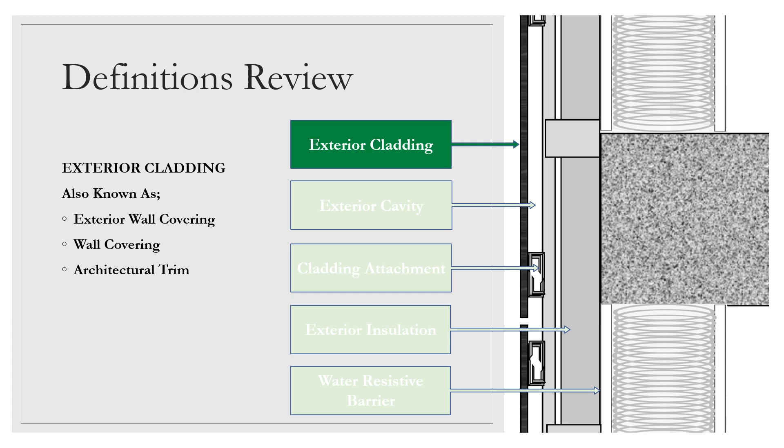So we start with exterior cladding. Exterior cladding might also be called exterior wall covering, or architectural trim. The exterior cavity, that's that cavity between the exterior cladding and the next layer. That's either the water resistant barrier or the exterior insulation. That is known as exterior cavity, airspace, concealed space, or just simply the space. You'll see that often in the code too.

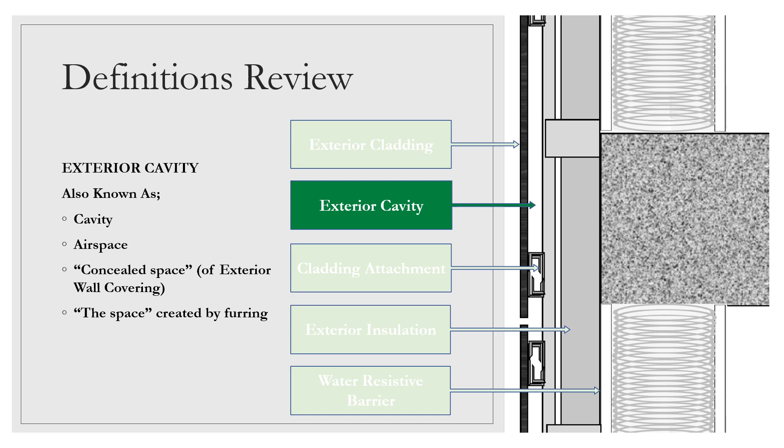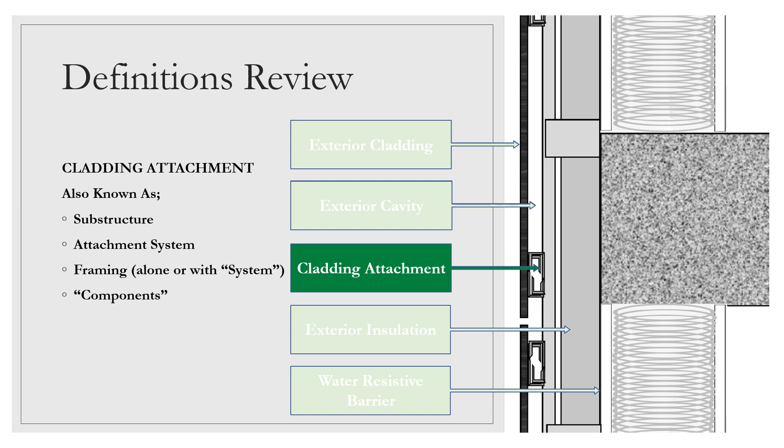Cladding attachment system, sometimes called substructure, attachment system, framing or framing system, or just components. For exterior insulation, you might hear me talk about rigid insulation or the CI layer.

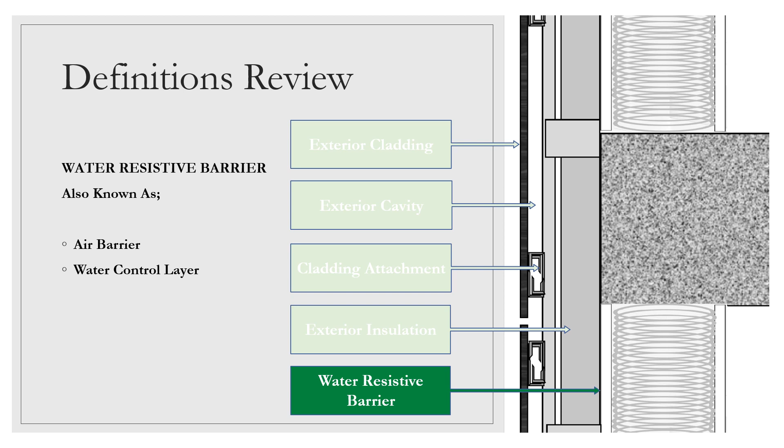The water-resistant barrier is mostly referred to as water-resistant barrier, but you might also see air barrier or water control layer - that's a very common one too. Together, these are also known as the exterior assembly, facade system, or exterior wall covering. You'll see exterior wall covering used both to mean just the cladding or the entire assembly with all its components.

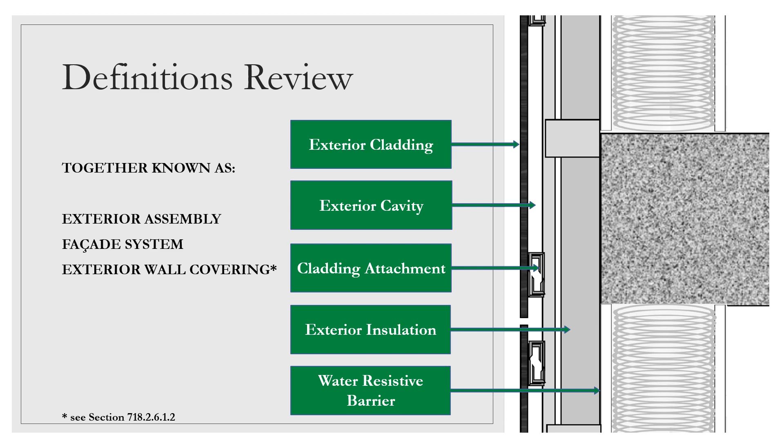Let's get into a quick review of NFPA 285. Probably if you're listening to this, you already have some familiarity with it. NFPA 285 is a multi-story fire test that determines whether the cladding or exterior assembly, including the cladding all the way back to the sheathing, contributes to the propagation of flame and heat, either up the wall to the next level or laterally to the next room.

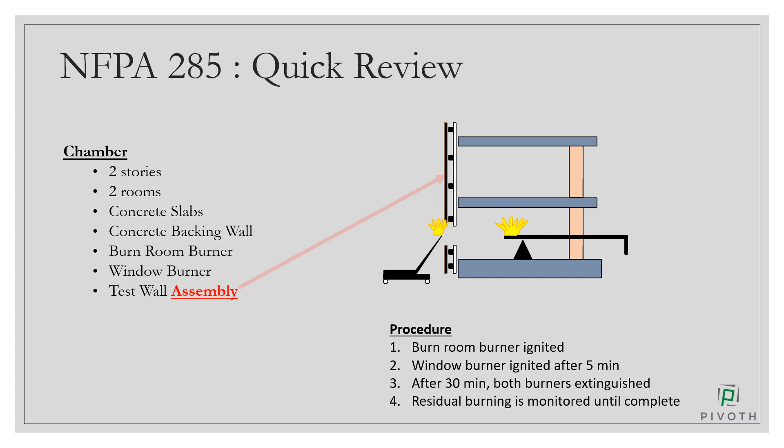The NFPA 285 test is conducted on a two-story assembly made of slabs of concrete, as you see in this section view. It has a bottom floor and top floor, a bottom room and top room. The exterior assembly is applied on the outside of those two slabs, and there's a hole that simulates a window in the bottom floor. That bottom floor has a burner to simulate flashover conditions, and then an exterior burner is applied to enhance that.

During this test, there are many parameters. The main ones are that there's no flame in the second room, and that the flame does not go above 10 feet or 5 feet from the window during the entirety of the test, and the heat does not exceed 1,000 degrees, both 10 feet above the window and 5 feet from the center of the window. It's important to remember that we're bringing a 10-foot by 10-foot box in terms of the area measured for this test, and we'll call back to that later.

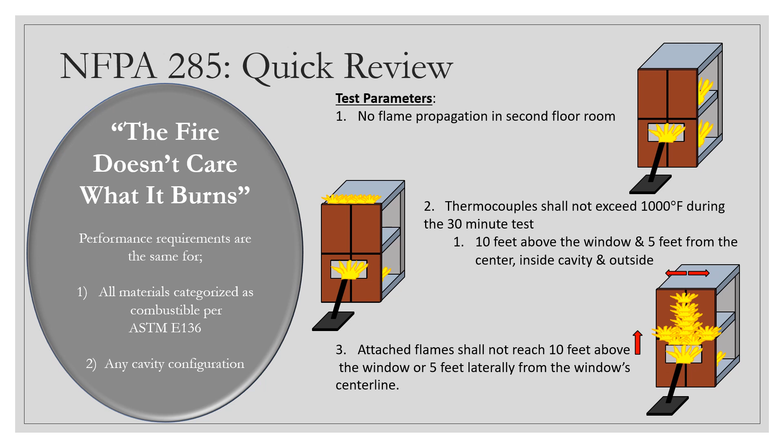The reason NFPA 285 is important to review is because the test was created based on the notion that fire doesn't care what it burns. Building code is always behind innovation in materials and applications. As new materials come into the code, NFPA 285 and its requirements are often used to say: materials allowed in certain building types or construction types perform in a certain way. So as long as we're applying materials that perform either just like that allowed material or better, those materials should be allowed on the building - because the fire doesn't care what it burns. That's important to keep in mind as we go through the language here.

NFPA 285 as a test, whether run as a project test with the project team and architect, or run by the manufacturer - which is most often the case - takes about 4 to 6 months at the quickest to put together. It ends up being somewhere around $40,000 to $80,000 all in, with about a week of build time and a day of testing to get it done. It's not a quick endeavor, and to accommodate changes like this, the industry has to go through a bit of a lag period in order to catch up and get these tests run.

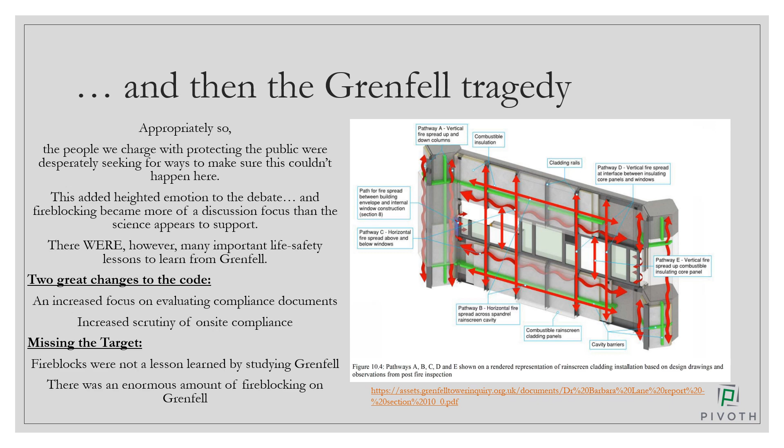Now let's get into the fire blocking sections of the code over the years. We're going to start with the fire blocking section that's going to take up most of today, starting with the 2009 IBC, going through the changes in the IBC, and then the changes that New York City adopted.

So in 2009, this is section 717.2.6, called architectural trim. It said that fire blocking is required in 100 square foot compartments wherever you have a concealed space for architectural trim. That's what the language says. It wasn't necessarily being enforced like this. Rule number 3 is that code language does not equal compliance, and enforcement was a little different.

You can imagine the NFPA 285 tested assemblies showed real performance in fire. So if you had an NFPA 285 tested assembly, often building officials would say we're not going to change the geometry of that assembly - it shows that it performs the way we want it to perform. So if you have an NFPA 285 assembly, you do not need to worry about fire blocking regardless of what the other language says. Put it up the way it's been tested in NFPA 285, and we're okay with it. Now this was not stated anywhere in the code, but a majority of building officials were taking this position, and that's where you get to some of the language we'll talk about later.

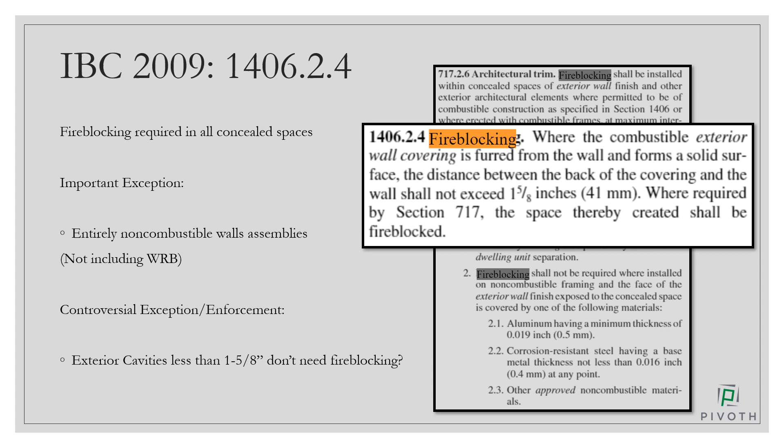Now in 2012, that section was changed - 717.2.6 became 718.2.6. They changed the architectural trim heading to exterior wall coverings just to reduce some confusion. And you'll see here, exception number 3 was added. So it codified what building officials were already using for compliance. It says fire blocking shall not be required where the exterior wall covering has been tested in accordance with and complies with the acceptance criteria of NFPA 285.

The exterior wall covering shall be installed and tested in accordance with NFPA 285. If you have an NFPA 285 tested assembly and that passes, use that tested assembly the way it passes, and fire blocking is not required. Then that section in 1406.2.3 was also modified to basically confirm that if you have an NFPA 285 assembly, regardless of the cavity depth, you do not need fire blocking.

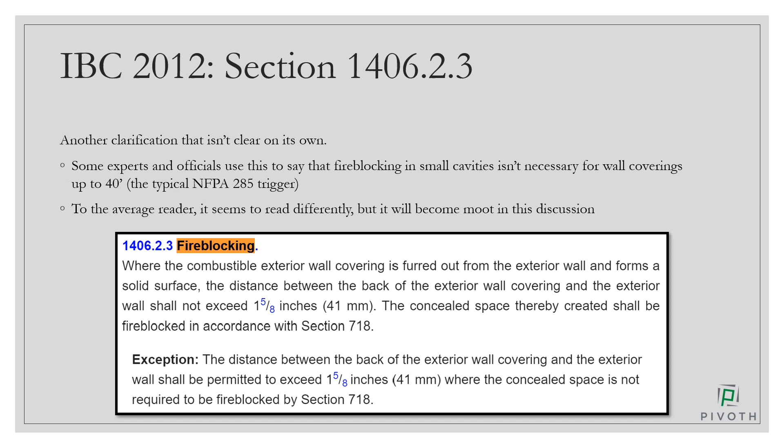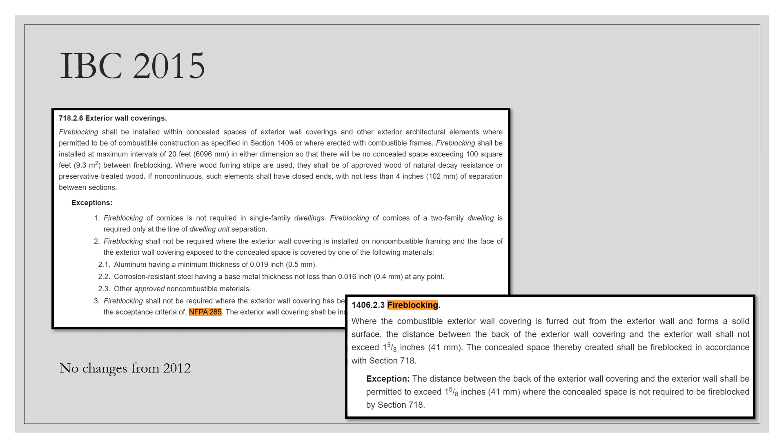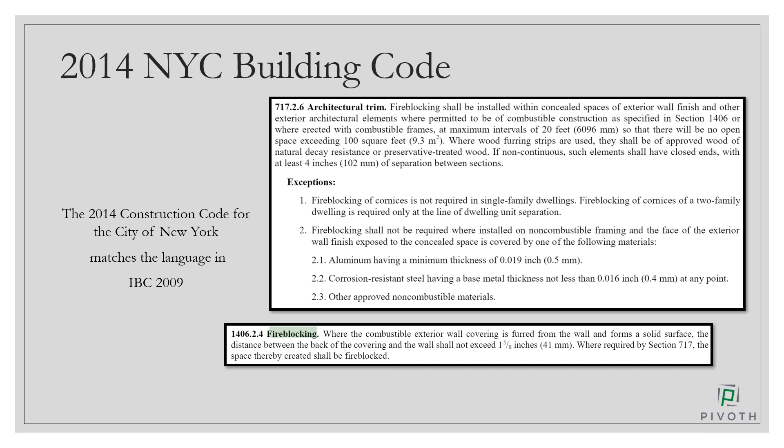Then you had IBC 2015, and the reason we're showing this is because IBC 2015 is the language that the new New York City Building Code is based on. So IBC 2015 is the same as IBC 2012 in this regard, and that's what we'll pick up the language from - the 2014 New York City Building Code. Now let's take a step into New York City, take that same section, and show that it matches the 2009 IBC.

All right, now we're at Local Law 126, which is the 2022 New York City Building Code. Local Law 126 is not just about fire blocking - it's about many other issues in the facade, but also the plumbing code, mechanical code, fuel gas code, and some other items. What we're going to talk about is the building code changes and specifically the fire blocking within the exterior cavity.

Okay, Local Law 126 is about 3,000 pages. There are a few hundred pages addressing the facade assembly fire requirements, and we're going to go over the basis of those, which then spider out into all the different places in the code that they affect. Importantly, the process is to amend the 2014 Construction Code for New York City rather than to take the IBC language and amend that. You'll see as we go along, if you're used to reading code, where those changes affect the code.

So first, let's take another look at that 2014 Construction Code for New York City. That specific section about architectural trim, or the fire blocking within the architectural trim, matches the 2009 IBC for those 100 square foot compartments with a maximum length of 20 feet, and doesn't have the exception for NFPA 285.

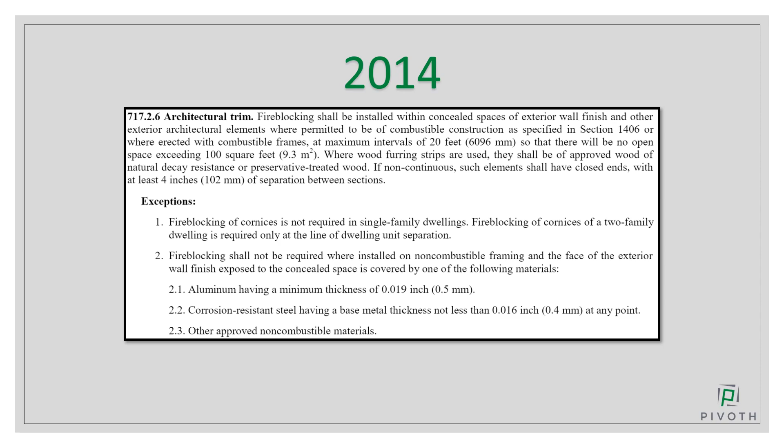Now you take those sections and you have that 1403.5, which was added in 2012, except New York City decided to add additional language to that, which made it what you see on the second half of your page. We'll talk about that here and there throughout the discussion today.

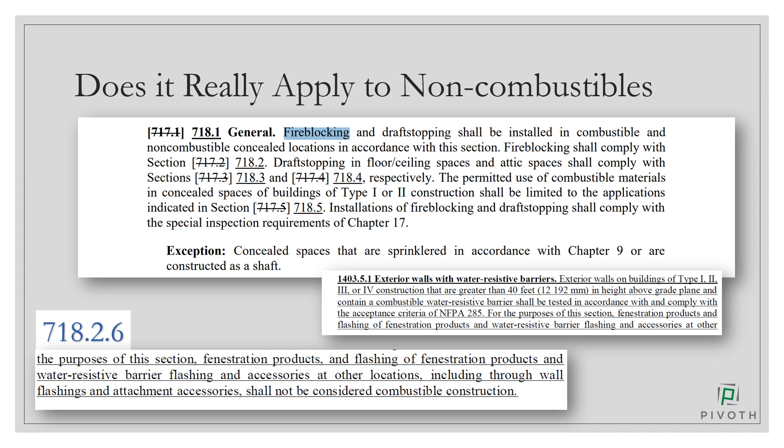So let's look at the non-combustible materials that are part of the exceptions here—materials that specifically are not going to require fire blocking. They have it listed as brick, concrete, stone, terracotta, stucco, or steel cladding in thicknesses according to table 1405.2, which is a table in chapter 14. We'll look at that in a second. But it's those materials in those specific thicknesses that are listed, as long as they have non-combustible framing, no plastic or foam plastic insulation, and a water-resistive barrier is the only combustible component.

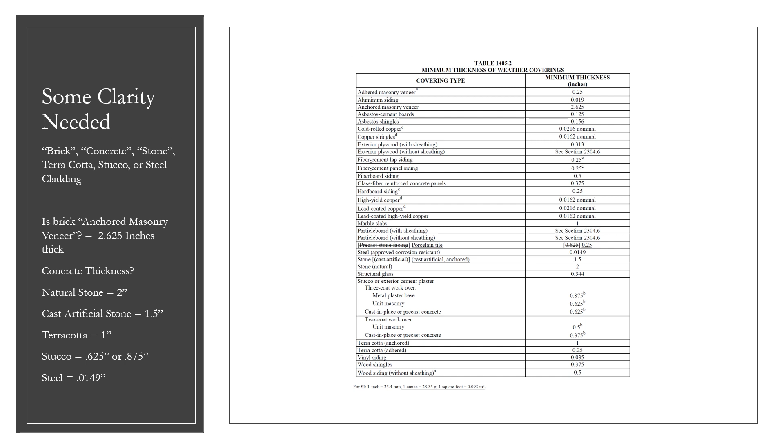So let's revisit those other non-combustibles. If you're using any other non-combustibles not listed in that previous exception, then you will need to have fire blocking in your cavity per the language. You see on the left-hand side of your screen a list of non-combustible examples, and I'm sure there are more we can add there. But essentially, with these and other non-combustibles that aren't listed, as long as you're using a combustible water-resistant barrier, you're going to need 100 square foot fire blocking compartments.

So that's essentially a 10 by 10. You could go up to 20 feet in one direction, so that would be 20 by 5 or anything in between. But importantly, it is compartments, so it is both vertically and horizontally. You will need to have fire blocking in your compartment for these types of materials.

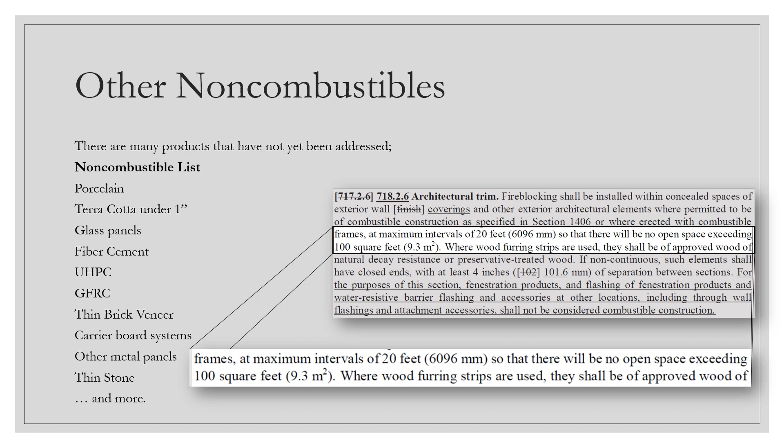That finishes the non-combustible exception. Now you get into the exception for combustible materials, plastics, HPL, MCMs, which you have listed in exception number 3.

Exception number 3 says that exterior wall coverings containing plastics, metal composite material, or high pressure laminates shall comply with section 718.2.6.1. That means they don't need to comply with the main section here for the 100 square foot compartments. They do need to comply with this listed section 718.2.6.1.

What does 718.2.6.1 say? Essentially, it says that you need fire blocking for plastics, MCM, and HPL around all wall openings, at every slab edge for a minimum height in terms of fire blocking of 8 inches thick, and then when the occupancy changes, whether that's vertically or horizontally across your elevation.

There's one more thing in that slab edge. It says that maximum intervals of 20 feet. So if you don't have a slab for 20 feet, that means that you would need to put a horizontal fire blocking in there at every 20 feet, or every slab, whichever one is less.

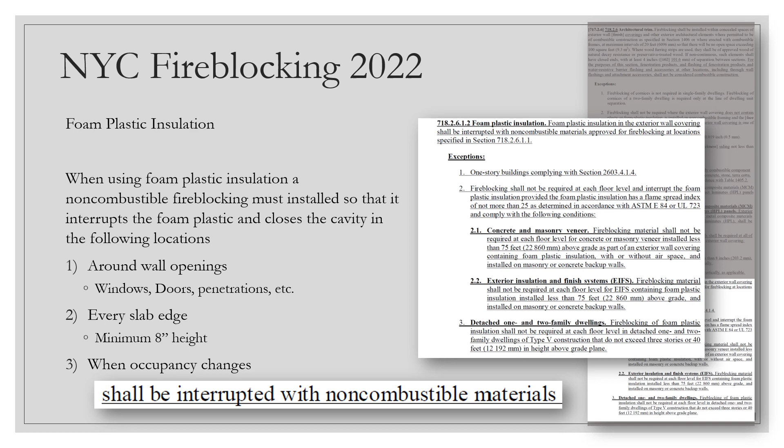Very importantly, if you're using foam plastic insulation, that insulation needs to be interrupted. So the fire blocking needs to go all the way from the back of your cladding to the sheathing or the weather-resistant barrier, and the foam plastic needs to stop, and then it would continue after the fire barrier again, or fire block again. That's something that needs to be noted if you're using foam plastic insulation.

The foam plastics fire blocking section has its own exceptions, and they are important exceptions. The first one is that exterior walls on one-story buildings do not need to have fire blocking as long as your foam plastic meets certain requirements listed here.

This second one is a big one. It says if you're using foam plastic and your exterior veneer is concrete, masonry veneer, or EIFS on concrete backup walls up to 75 feet, you're not required to have fire blocking at each floor line. There's still a question of whether fire blocking is required for openings and so on, but it's a big exception for using foam plastic behind these materials up to 75 feet.

And the final exception is on detached 1- and 2-family dwellings. Fire blocking of foam plastic insulation shall not be required at every floor in detached 1- and 2-family dwellings of type 5 construction that don't exceed that 40-foot height you've seen before. So the question still remains, do you need it around openings and so on? But again, a very important exception.

So what does this mean for other combustible materials that are on the outside of buildings? Well, essentially what they've done, again, the same thing they did with that exception for non-combustibles in the fire blocking section, New York City chose to specifically list the materials that you can perform an NFPA 285 test on to comply. Those materials are EIFS, MCM, HPL, and FRP. All other materials don't qualify under this section, so you can perform your NFPA 285 test to comply with those materials as long as you're using those materials.

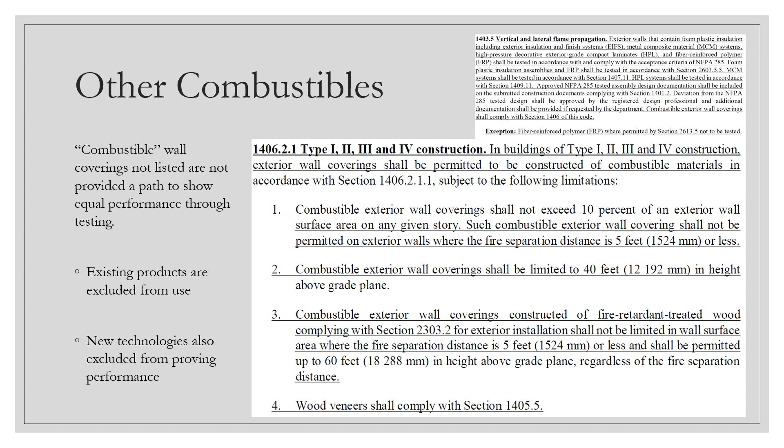If you're using any other combustible material, then you have to go to the combustible materials section, and essentially what that says is that other combustible materials must follow different rules. They cannot qualify using NFPA 285. They now have these following limitations.

So what are the limitations? If you've been using other combustible materials as your exterior wall covering, they are limited to a maximum height of 40 feet and 10% of each story on an elevation. They're also not allowed on walls that use CLT or SCL as their structural members.

So now that we've reviewed the language, let's get into what that means in terms of how we're going to have to detail our buildings, our wall coverings, the rain screen assembly beneath that to accommodate these fire blocks.

What you see here is a fairly rudimentary four-story building. The yellow lines are your non-combustible fire blocking. I've put them at each slab, which I'm assuming is about 12 feet, and then 8.5 feet from vertical fire block to vertical fire block, and that creates our 100 square foot compartments. You may note that I am using the fire blocking requirements for non-combustible materials, but we can basically extrapolate this for what we need to do for combustible materials as well.

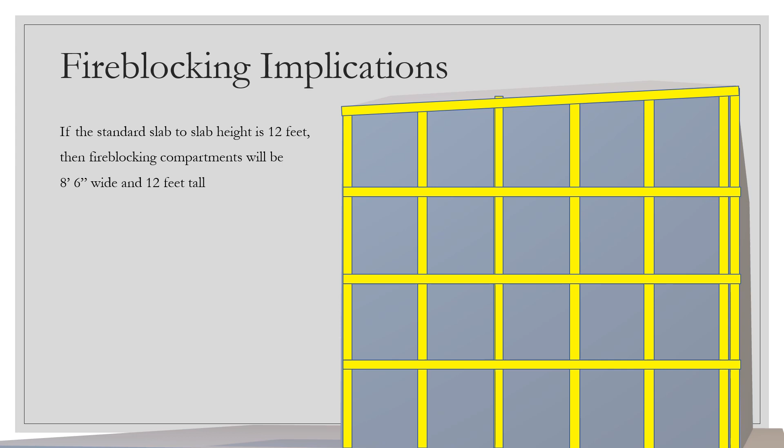So the first thing that we'll have to do is put our cladding material in between those horizontal fire blocks if we want to maintain any sort of ventilation and drainage to get the most out of our high performance walls that use ventilation and drainage—your rain screen walls, ventilated facade cladding materials, or cavity walls.

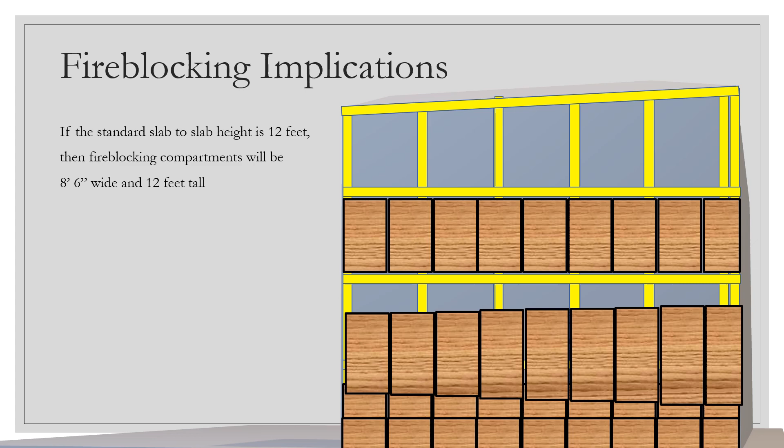So let's put those panels up between the horizontal fire blocks. And then because we are putting those panels up between the horizontal fire blocks, and we want to trap as little moisture as possible against the back of our cladding and inside of our assembly, we're probably going to want to put thin strips of our wall covering or exterior cladding over those horizontal fire blocks, specifically as thin as your cladding material will allow you to go. And so we're going to put those up as well.

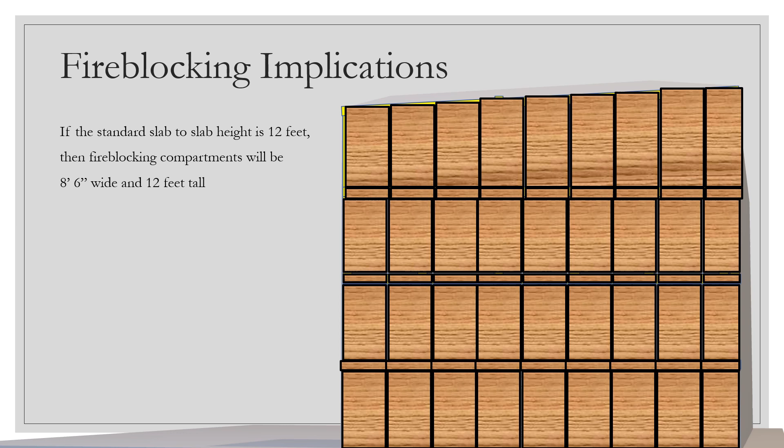Now, this is going to be essentially the aesthetic that is going to be the most simple way to accommodate the fire blocking requirements. It might be the only way to do this with rain screen assemblies, but I'm sure that there are qualified designers out there who come up with some interesting designs.

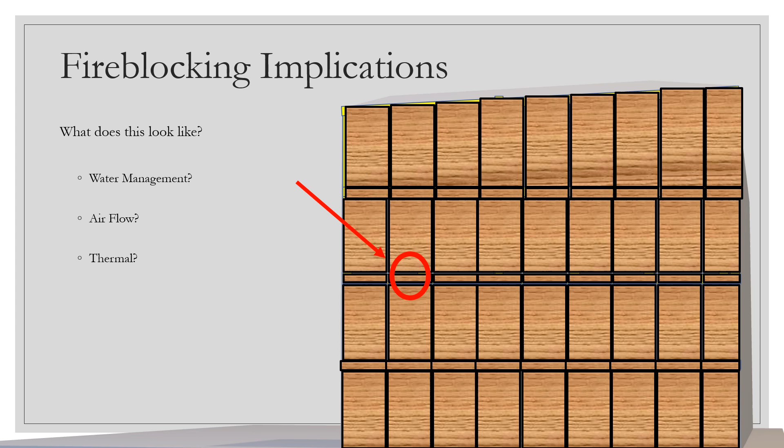So the question is, what do we do around these spots, because this is where we have that horizontal fire blocking. Let's take a section view of that spot. Essentially what you see here on the right-hand side is a concrete slab, a stud wall both above and below that concrete slab, and then some sort of insulation outboard of that stud wall and your exterior cladding. For this, I'm not showing the attachment system or your water resistant barrier in any part of the assembly, although you can obviously figure out where those would go.

The important part here is that we've put that 8 inches of fire blocking. This might be 4 inches of fire blocking. One of the things that is not defined is exactly how thick the fire blocking needs to be for all other areas. The slab for combustible materials is the only one that dictates 8 inches, so it might be 4 inches. Whatever that is, it's still going all the way from your wall to the back of your cladding to make sure that we are closing off that exterior cavity.

So as you can imagine, if you've been doing this for a little while, that's going to cause some problems for ventilation and drainage, which is exactly why you're creating that exterior cavity. You're going to get water coming down the top of that and stopping at whatever that fire blocking is. Maybe that fire blocking doesn't absorb water, but it's definitely going to direct water one way or another, and you're going to get more water against your wall and other places that you wouldn't want to have that.

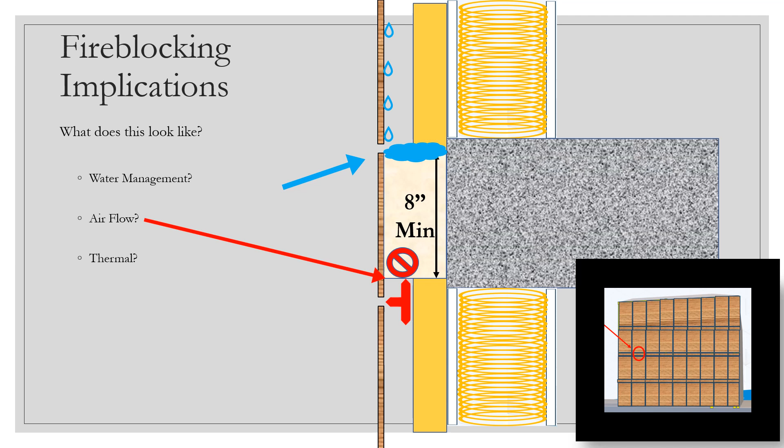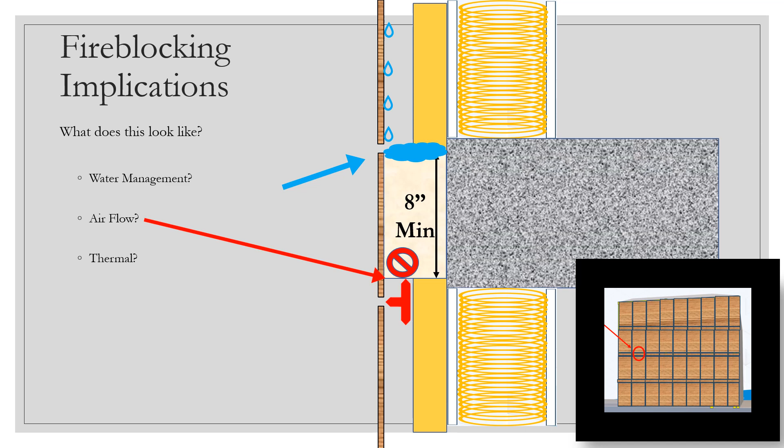So let's look at the bottom—it has the same issue with airflow. The airflow issue is a little easier to address. Below the fire blocking, behind the fire blocking, obviously there's going to be no airflow within the fire blocking regardless. But below the fire blocking, you can put that joint there and still maintain some airflow behind your system as long as the bottom has a joint also, for that water.

Obviously we don't want to put metal flashing all the way through your exterior insulation continuously around the building at every slab and all of your openings. But if we do it right on the face of the insulation, you are probably going to have problems with getting water in places where you don't want it and places where it's not easy to dry out.

So essentially, you have to put something going all the way through the insulation so that you can manage this water. And the obvious answer to that would be some sort of flashing, usually metal. And so now you have this flashing directing water out so that you're not getting it accumulating at your fire block.

That flashing has to go all the way from basically flush the face of your exterior wall covering, and then back all the way to your water resistant barrier. In that case, you are creating a continuous thermal bridge all the way through that wall assembly.

But also all around the building every time you have fire blocking, that carries with it some other challenges as we talk about energy performance and things like Local Law 97 and how we comply with that, because that's about the actual energy we're using in a building rather than a prescriptive way to build walls. As we put these continuous thermal bridges all the way around the building at every opening, wherever we need fire blocking, we are decreasing the performance of that wall, and we're going to need to deal with these competing requirements in terms of exterior wall performance.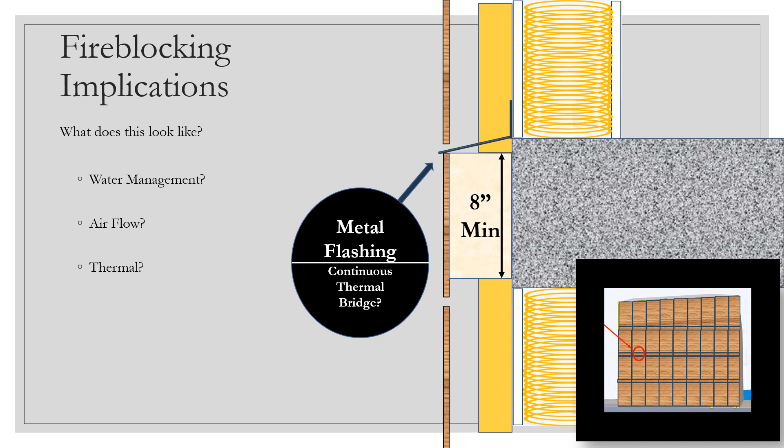You might put a membrane flashing back there that goes over your wall system, out over the exterior insulation. But the question on the membrane is really what are we putting it over, and how is it integrating with the rest of the system, and how durable is it if it's attaching to several different materials before it gets out of the system.

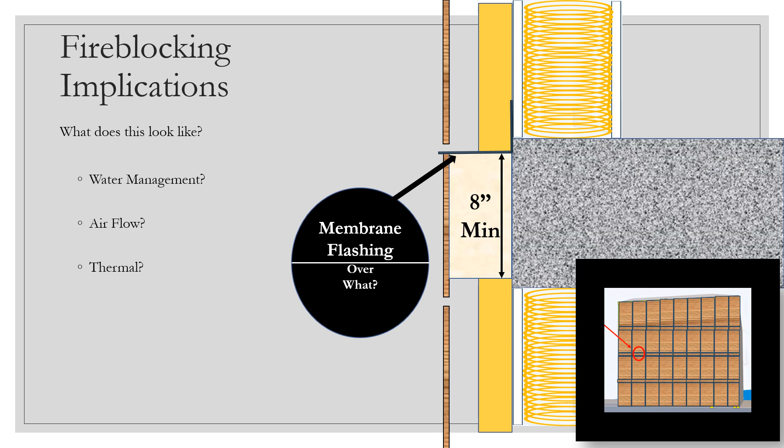So those were the options that essentially cover the approved ways to fire block. One of the things you might be thinking is, why don't we just put a piece of steel angle going all the way through the wall assembly, essentially coming to the face of the cladding and breaking up the compartments, but widening those joints, and now you have your airflow, you have your drainage, and you have your fire blocking.

That steel, for the most part, is going to do well to reduce the flames that come up the wall assembly or the exterior cavity. Well, steel is not one of the approved fire blocking materials in the 2022 New York City Construction Code, and there's some good reasons for that, but also we need some solutions.

So, in speaking with the Department of Buildings, these sort of things definitely can be reviewed, and we'll talk about some of the language they put in there for that on specific projects. But as of now, with the language that we see, this would not be an acceptable way to create fire blocking, although it would be a sufficient way to create that drainage and ventilation we need for your high performance walls. Probably still have your thermal control issues.

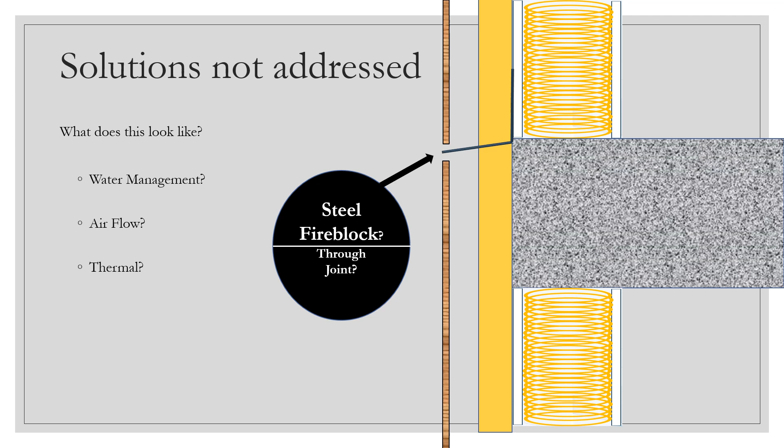Another question is, can we use activated fire blocks, right? That would be a really great solution in order to maintain the airflow and drainage that are designed into these high performance systems like rain screen, ventilated facade materials or assemblies.

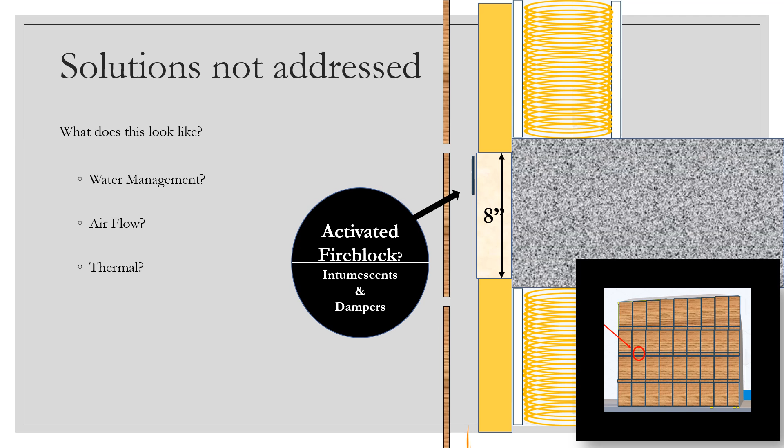Activated fire blocks like intumescents are something that are around and now are specifically made for these exterior cavity areas. I myself have tested several NFPA 285 tests with these sort of activated fire blocks, and what they do is, when you put them in, they are a small strip here, and they allow for the ventilation and drainage that you would want in a high performance assembly. And then as you have a fire, these things heat up to a certain temperature and expand and char over and create a fire block specifically for the fire event.

These are not currently addressed as part of the New York City Building Code. They are not in the approved materials list. However, the building department has assured me that they are looking into these things, and hopefully we'll get some guidance on this. They have shared that we would need to, as designers and manufacturers and engineers, come up with a package that would prove to them that this would be a sufficient solution.

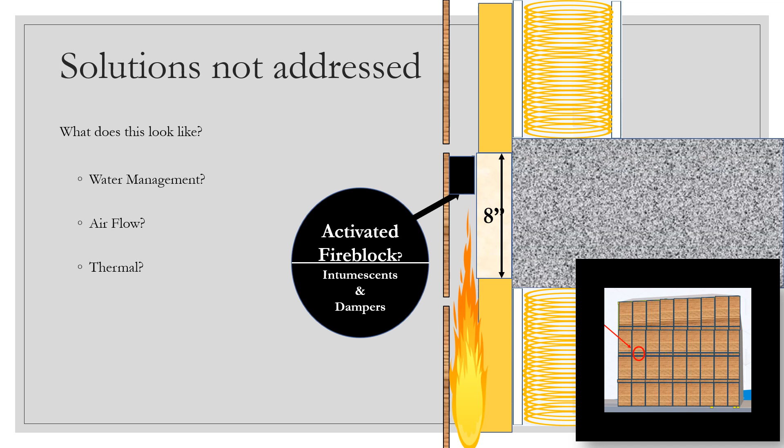This is the part of the presentation where we talk about some of those other topics around fire blocking. Now, there are a lot of them, and if you are working on a specific project, you should be going through and looking at what specifically applies to that project.

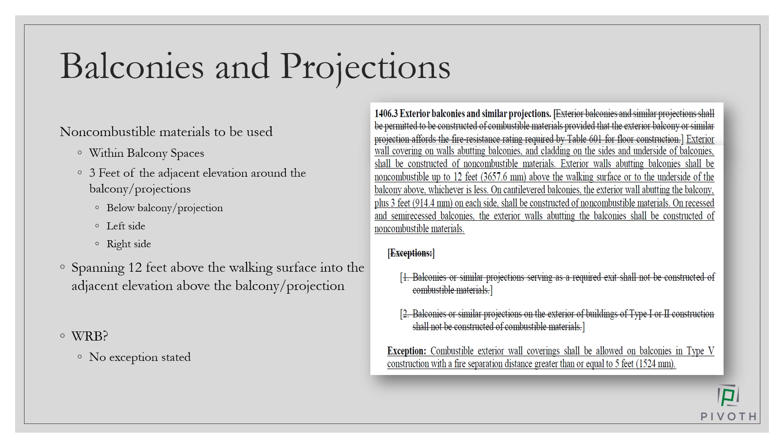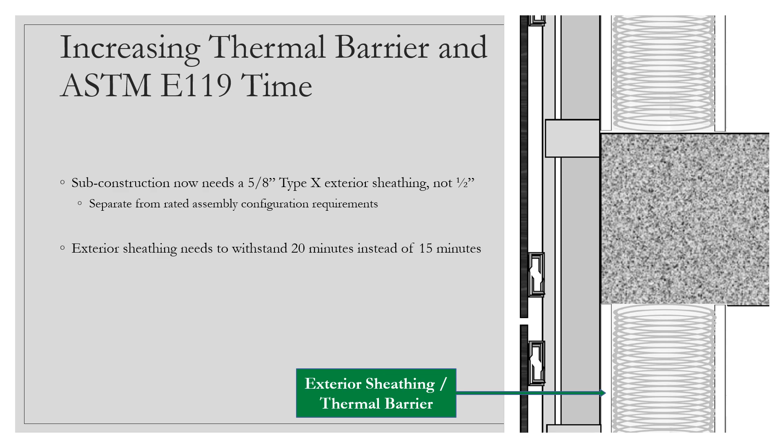Another related change is that they've increased the requirements for the thermal barrier within your wall. That means you're now going to have to use something equivalent to 5/8 inch type X exterior sheathing rather than 1/2 inch. And that exterior sheathing will need to withstand 20 minutes in an ASTM E119 test rather than 15 minutes.

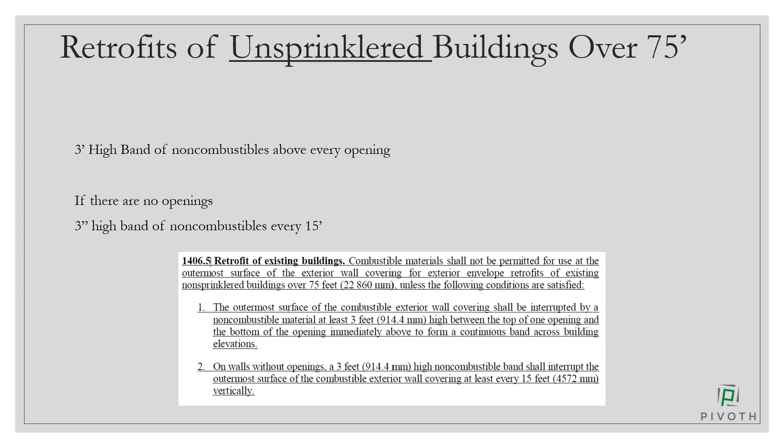Retrofits of unsprinklered buildings was another topic that went back and forth in terms of deliberation, and even from the proposed language to the final language, you'll notice there are very significant differences. Essentially, if you have an unsprinklered building that you are retrofitting and that is over 75 feet, you'll need to put up 3-foot bands of non-combustible material either above every opening or at a maximum of every 15 feet. So that's what you're going to need to contend with if you're retrofitting unsprinklered buildings over 75 feet.

HPL and MCM, there's a few other things to note. The first thing is that the 40-foot exception is essentially gone. You will need to have an NFPA 285 test for HPL and MCM down to grade now, and that means your assembly needs to match your NFPA 285 test down to grade. Also, HPL and MCM will not be able to be used on the exterior of a CLT or SCL construction project. And again, you have some of those other requirements that we talked about before.

Another good change to the code is that CLT is now permitted to be used. So if you're building with CLT or SCL, the reason why we're talking about it here is that you'll need to use non-combustible exterior wall coverings for those construction projects.

So NFPA 285 will need to be run with fire blocks in place. If your material or wall assembly needs NFPA 285 to comply, then that NFPA 285 test must have fire blocking in place. You cannot just add fire blocking to an NFPA 285 tested assembly and be compliant.

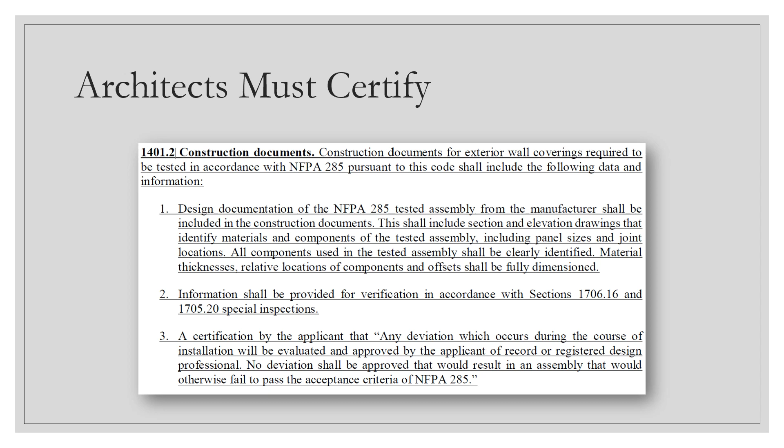Any deviation which occurs during the course of installation will be evaluated and approved by the applicant of record or registered design professional. No deviation shall be approved that would result in an assembly that would otherwise fail to pass the acceptance criteria of NFPA 285. Very interesting language, putting the architect on the hook not only for what is done on site, but also for whether that will pass NFPA 285.

I can tell you from my experience that this is a very difficult thing to certify. I am very curious to see how the Department of Buildings and architects in New York City respond to this language, but there it is.

So I know this was supposed to be a no judgment zone, but I figured I would end on the thoughts I had on some of this language. You've heard some of it peppered throughout, and I've tried to be as no judgment as possible following rule number 2. But yeah, I think this is going to make it a little more difficult to achieve high performance building enclosures.

We're all going to have to work a little harder to find innovative ways to meet competing goals, right? In New York City, we have Local Law 97, and that's going to be harder to achieve, especially if we have to put any sort of continuous breaks or bridges into the insulation layer to achieve that. Obviously, the increased interruptions in the wall covering and any other additional penetrations we're going to have to create are going to create more paths for air leakage and water ingress into the walls that we don't want.

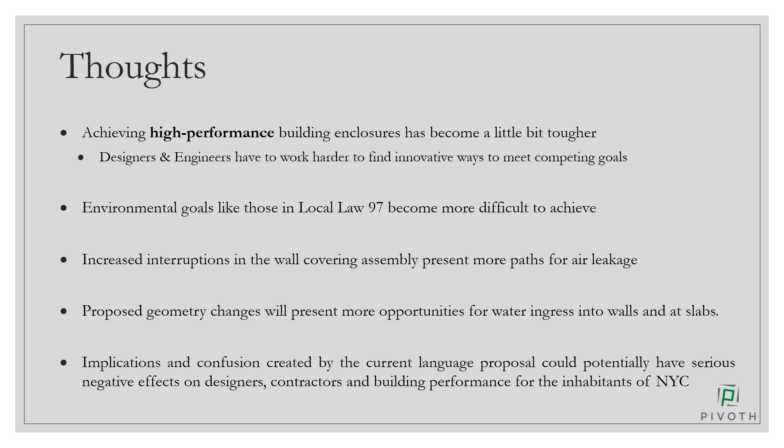And just the general implication and confusion around the current language, I think, could potentially have some negative effects on our designers, contractors, and the building performance for New York City in general.

Obviously, I think New York City could have and should have done better in terms of the fire blocking requirements. I think that distracted a lot of focus that could have been better used for compliance requirements that would have made better buildings. But I also think there are a lot of good things in this code, and some things the rest of the jurisdictions in this country should look to follow in some way. That essentially revolves around the increased focus and scrutiny on compliance documentation. I think that's something that is needed around the country. And as long as we make sure that designs match testing and buildings match those designs, then we can build better buildings in New York City.